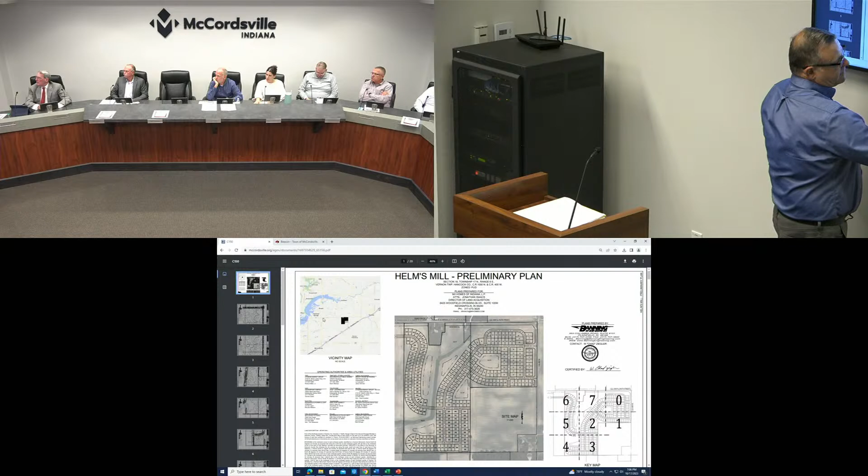And there is an existing tree here too that he would like us to preserve. We do have a tree preservation area along all of the perimeter at 15 feet, and that's shown on the primary plat as well.

Really, unless there's any questions, I think that's all I really have for tonight.

Ryan, can I ask if the records indicate that the board did receive the comment letter from Mr. Kelly for our consideration tonight?

Does the board have any initial questions of Mr. Isaacs? Could you go through the planned phases of your development and the timing? And I believe Fishers is going to place a roundabout at the northeast corner of the development, and their construction schedule sort of coincides with yours in some respects?

Yeah, I can answer all of those questions. We're going to get questions probably about traffic. So the sewer connection point is down at the southern portion of the development. So we'll bring sewer up the ditch, so to speak, to develop sections 1 and 2, 1 being farthest to the north. And that consists of approximately 50 lots in that first phase.

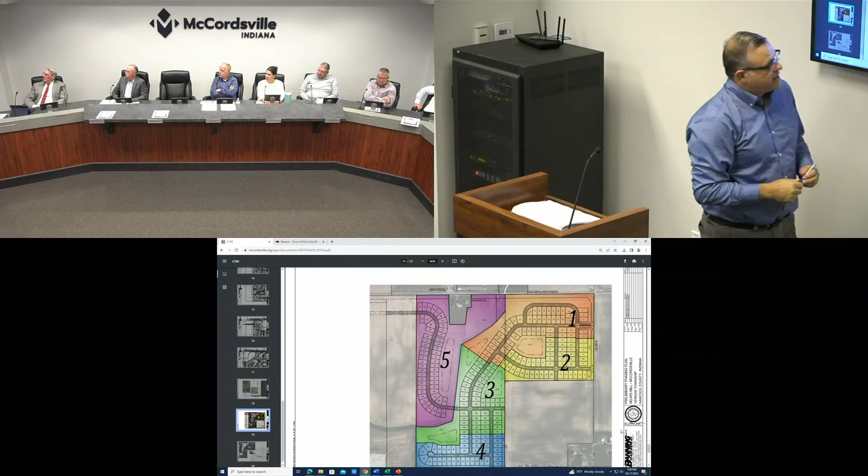And then the yellow is section 2, and then section 3 and 4, and then finish up with section 5 there. And that really kind of coincides well with a dirt balance for the site. This pond will take care of the dirt for 1 and 2. You've got a pond here for 3, and then this pond will take care of the balance of the site.

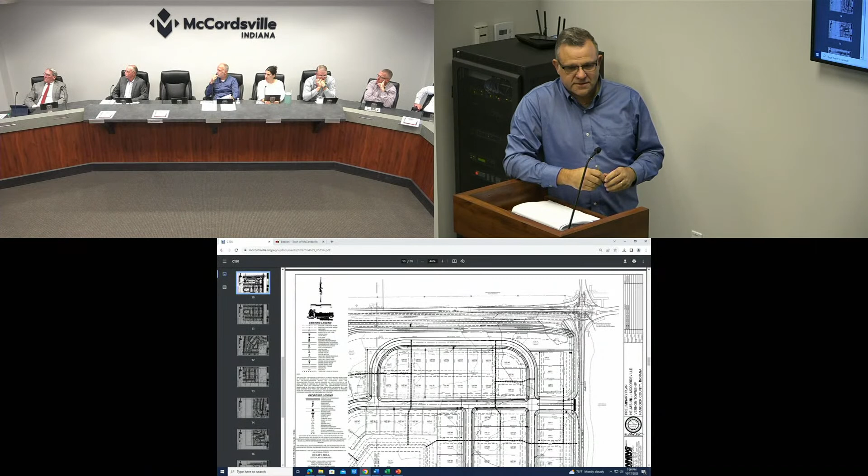So we have met with the city of Fishers and actually have a subsequent meeting scheduled for Thursday with the Hancock County surveyor as well. There is, I believe, we show the roundabout on the plans. So that roundabout was provided to us by Fishers' engineer so that we could coordinate whatever right-of-way needs they have, as well as drainage needs.

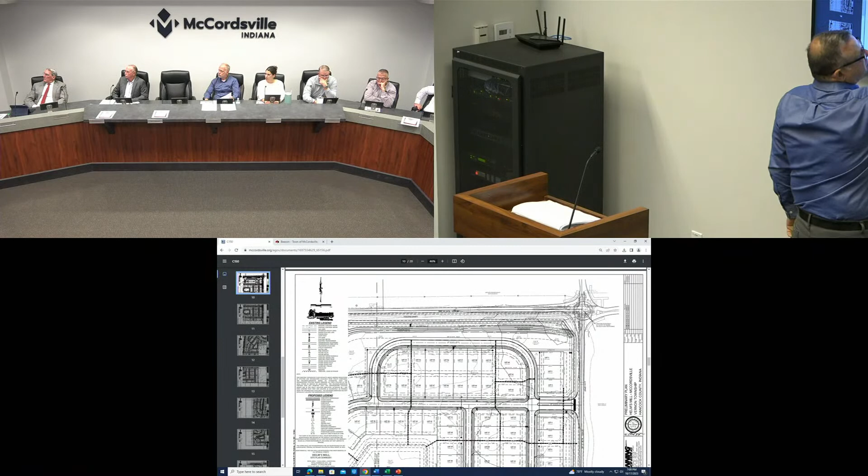So you'll see that there is an open ditch that comes across 96th Street here. Fishers, as part of the roundabout, will be putting in a box culvert underneath County Road 400, just on the south side of 96th Street. And that's to accommodate all of the surface water that comes from the east. Right now, there's 2 18-inch drainage tiles that run along that area, and the county surveyor has asked that it be open ditched at this point.

So rather than having just an ugly ditch on the side of the road in front of a neighborhood, we are asking it to be a 2-stage ditch, which means it would have the normal water level in a deeper trough, and then a shallow shelf. So in high water times, the water would come up in that shelf area. It can be well landscaped. It won't get drowned out, it won't die from having too much flooding. So we think we can make that look more like a river corridor, so to speak, than an Indiana ditch that we typically see around.

Now, is this ditch going to be your responsibility once you turn over the HOA for maintenance? Are you planning on doing riprap through there? What are some of the design concepts that you're looking at with that?

So it'll be a county surveyor responsibility. It'll be a legal drain. So we are working with him on the design of it. I think he's agreed with the concept of the two-stage ditch. So there is a detail of what that ditch would look like, and then our landscape architect will be choosing the appropriate plantings to make it as good as possible.

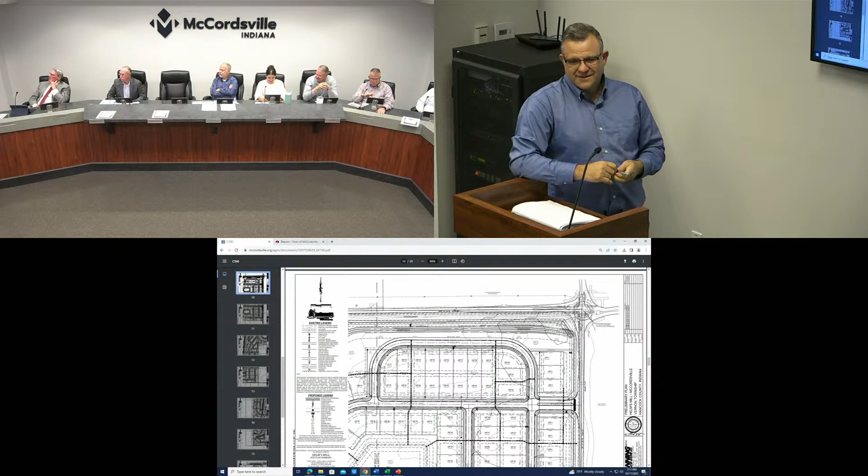The idea is that the two-stage ditch should be more self-sufficient than a typical old ditch. With a regular ditch, you probably have to do riprap and other things to control erosion. In this case, normal water level goes through the ditch, with riprap and rock at the bottom. Once the water stages up, it'll go through vegetation that can handle more of the wet, more of the push. The goal is that we don't have any erosion, so once it's established, it'll be more like a river corridor.

This is a town boundary, so the east-west road on the north is Hamilton County's purview, and 400 on the east is Hancock County's purview. Is that a county road? No, it's ours - that's McCordsville's.

As far as the stormwater, there are two authorities - McCordsville Stormwater controls some of it, and the surveyor controls the ditch part. Can you elaborate a little bit on the 400? 400 would be ours just where we have annexed through, so it's just going to be a small piece of it.

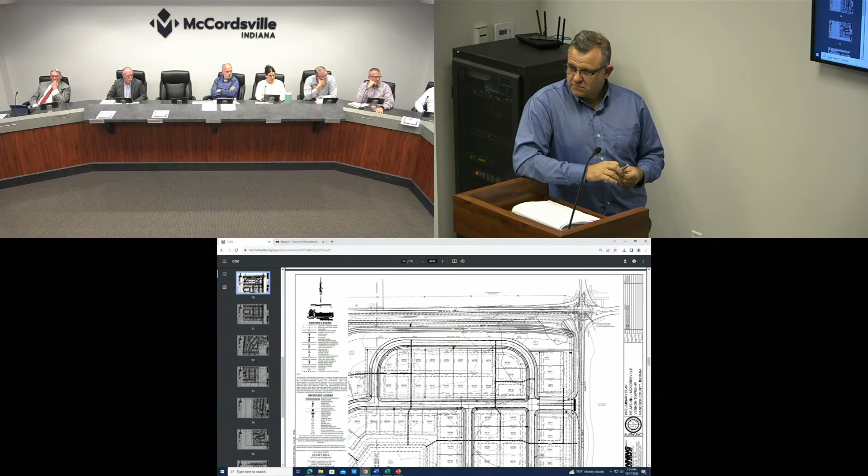Just bordering this property directly, and then south of that to the crossing at the railroad will be a Hancock County road. As far as the stormwater, all the stormwater infrastructure within the development is the town's, and then the ditch would be the county surveyor's - they control that ditch, including the discharge point where our storm sewers tie in. That's consistent with any other ditch in town.

Have you requested any variances in the easement from the top of bank on the county ditch? It seems like some of your homes are very close to that ditch, and there's like a 75-foot top of bank easement.

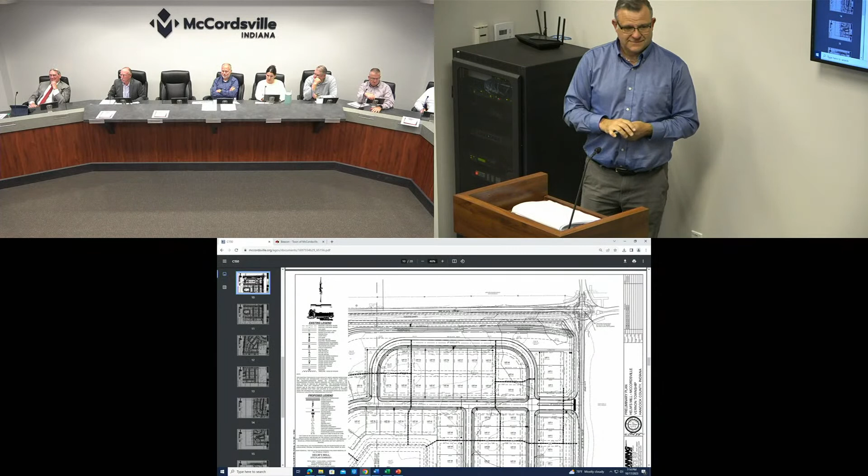I think it's maybe in section 5.

Do you swear or affirm under the penalties of perjury the testimony you're about to give will be the truth, the whole truth, and nothing but the truth? I do. Okay, give us your name and spell your last name for the record.

Steve Brehob with Banning Engineering. We've done two-stage ditches at other locations, and as Jonathan talked about, the whole idea is it reduces maintenance and can look more like a natural channel as opposed to a big, wide legal drain. A legal drain usually has a 75-foot width across the top.

That's something we'll be talking to the surveyor about, because typically with a two-stage ditch, that overall width can be reduced. The idea with the 75-foot legal drain width is that you're digging the thing out and throwing all the spoils off to the side. You're not going to do that in the two-stage ditch, and you're probably not going to throw the spoils into the neighborhood, so the width is usually 50 feet or in some cases less. But that's something we'll work with the county surveyor on - what's the appropriate width for maintenance.

So you haven't asked for a variance yet, but you're anticipating doing that? Yes, we're anticipating doing that and anticipating it being granted.

So when you do your secondary plat, can you mark on that the extent of the variance and what the variance actually is? Yes, at the secondary plat we would show whatever the agreed upon width in that easement is. It's almost a little hard to tell how far the variance is granted - there was one where the easement would actually run up through the corner of a home site if the variance hadn't been granted, but the extent of the variance was not marked on the plat, so it was an area of confusion.

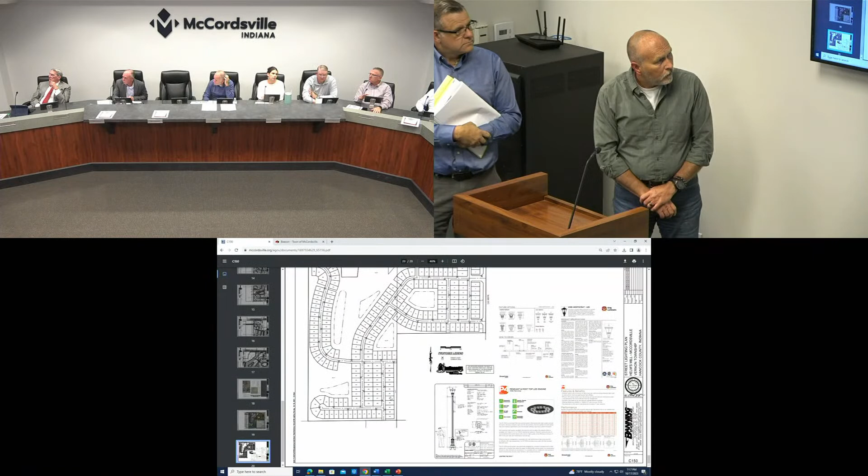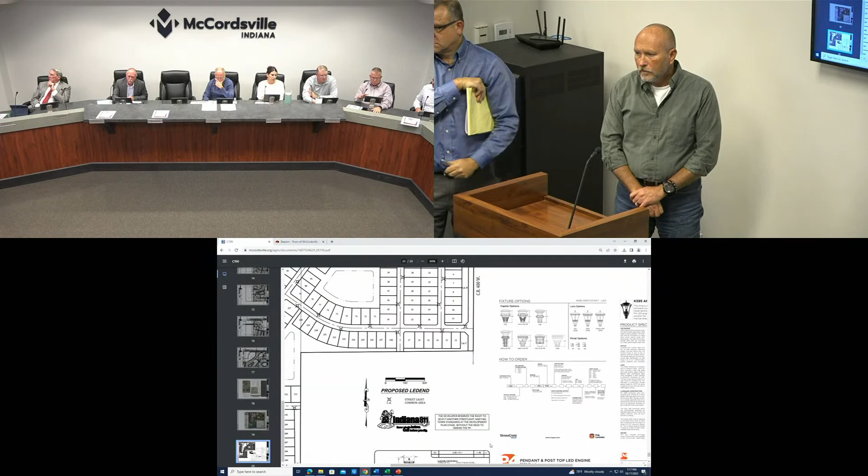I wanted to call out, I don't know what sheet it's on, the street light shown right there. That is our standard street light. The petitioner has added a note to the plans at staff's recommendation that would allow them to change that street light in the future, so long as it's shown on a development plan to the plan commission. So, all we're saying is if they choose an alternative street light, it would still need plan commission approval, but they would not have to come back and amend their primary plat.

Because traditionally, you don't even show streetlights on primary plats, right? We're looking at bulk standards with the primary plats. We're making that very clear. They still have to seek approval. They will still have to comply with whatever language is in their PUD ordinance. But if they do change this streetlight and it conforms to the PUD ordinance, and they show it on a development plan, which gets plan commission approval, the primary plat would not have to be amended.

And then the last thing staff had, and we've kind of touched on this already, is we wanted some discussion tonight on the two-stage ditch for the reasons you guys have already denoted. It's not a primary plat item, but whatever feedback or direction you can give in terms of your expectations for the look, feel, aesthetic of that two-stage ditch, we'd love to hear that tonight so the developer can hear it, as they move forward finalizing that design in conjunction with the Hancock County Surveyor's Office.

That would be fantastic. Ryan, I realize that the surveyor's office has jurisdiction over that area. Do we have any say moving forward in what the look of that will be, besides what they're suggesting with the two-stage ditch? During that review process, do we have any, or do we want that?

We can certainly go and make comments and make requests, and we've had some initial discussions with Chad about that, and they seem to be open to the idea of some decorative or aesthetic elements like boulders and outcroppings and landscape plantings. Ultimately, it is their decision, but they have been open to those discussions, and they seem supportive of the understanding that the town would like to see that occur here, especially due to the location being really the northeastern gateway to our town. So they seem open to it, though it is ultimately their decision. Staff will certainly go and deliver whatever message you would like us to deliver to the surveyor's office.

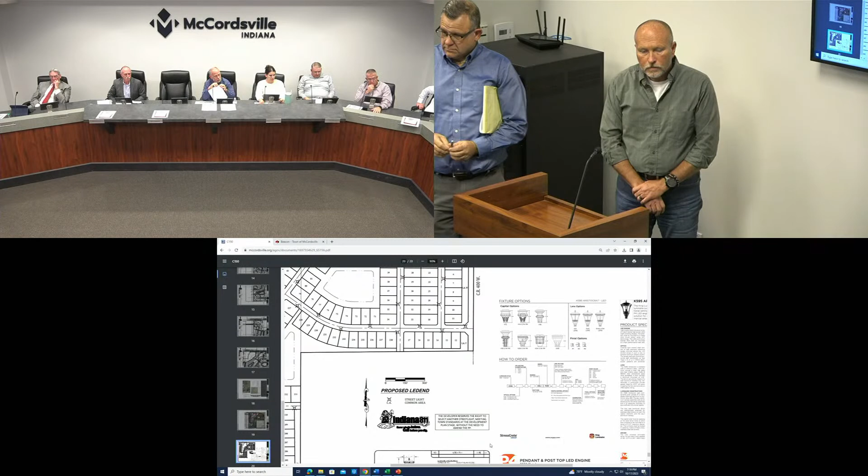So we're kind of looking for a little bit of direction from the public body, which I think adds a little bit of weight to what we then go and make a request for. Well, I'm thinking, like Greg, that this is the entrance to the town, and wouldn't a guardrail be required next to the open part of that ditch to protect from slide-offs on the adjacent road?

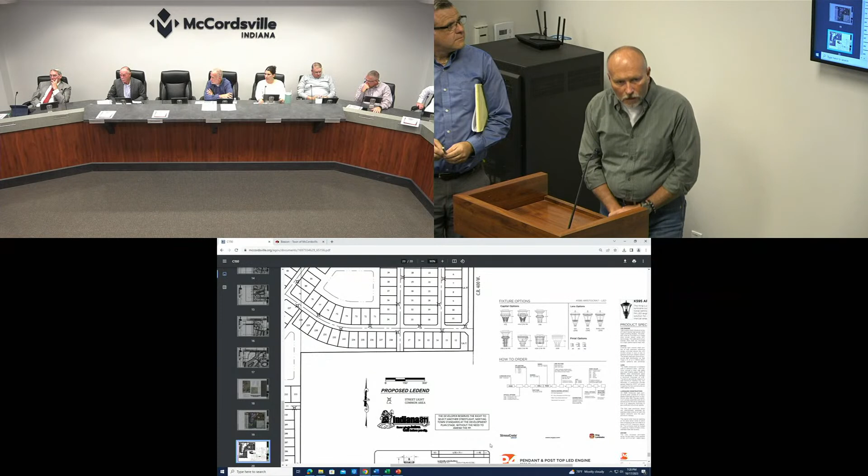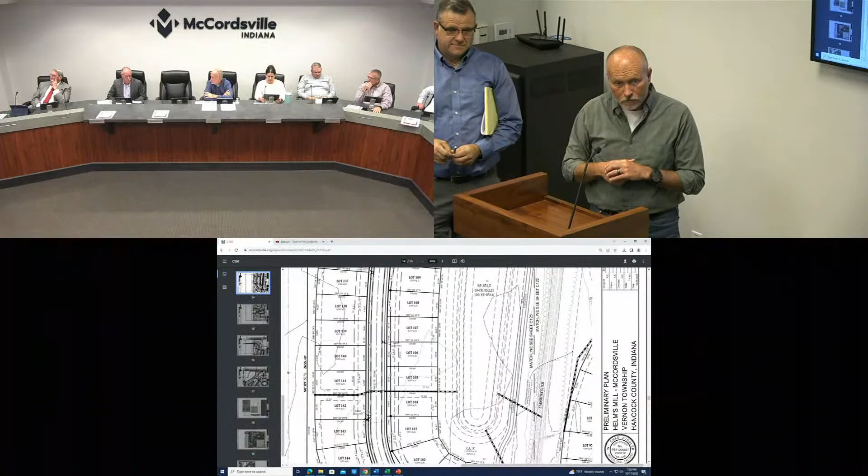I think the ditch itself is going to be far enough away that it would be outside of the clear zone of the roadway and not require a guardrail. I certainly, from an aesthetic standpoint, would not want to see a guardrail. I was going to say if a guardrail is required, my personal preference, and I believe the public's preference, would be for a wooden guardrail, if we could get one like is on the trail by 96th and Carroll Road.

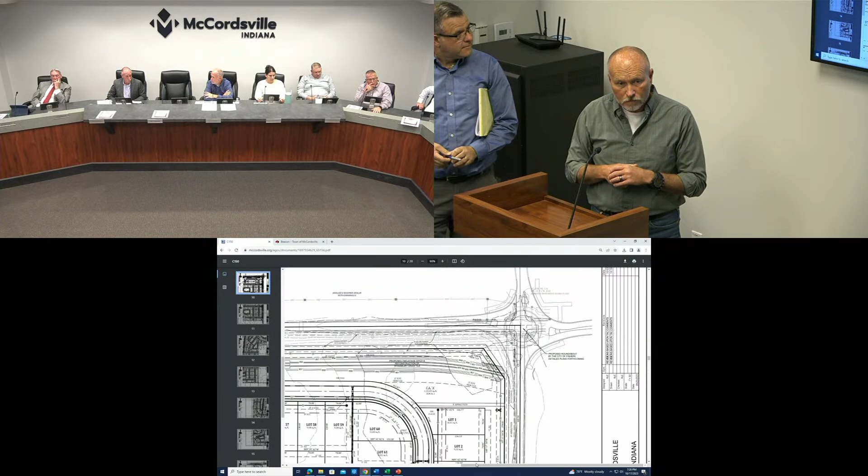Or would that be Fishers' responsibility, since when they do the... Right, if they wanted that. If we get input.

Our stormwater ordinance requires some form of barrier if a detention pond is within one right-of-way width from a public roadway. It does not cover a ditch like this, so I think that decision gets basically pushed off to the county surveyor's office. They have enforced that in the past where the ditch is directly adjacent to the roadway. I have not had any conversations with the surveyor's office where they were anticipating a guardrail along this. There is one, actually a lake south of 116th Street in Fishers, and there was a slide-off there.

The barrier was a white rail fence, and the car went through it. A passerby was able to rescue the driver before she drowned, but there was not a guardrail there. It's substantially off of 116th Street, so I imagine it exceeds the distance requirements for a guardrail, but it was protected with a fence, and it nearly resulted in a fatality. So some protection might come up.

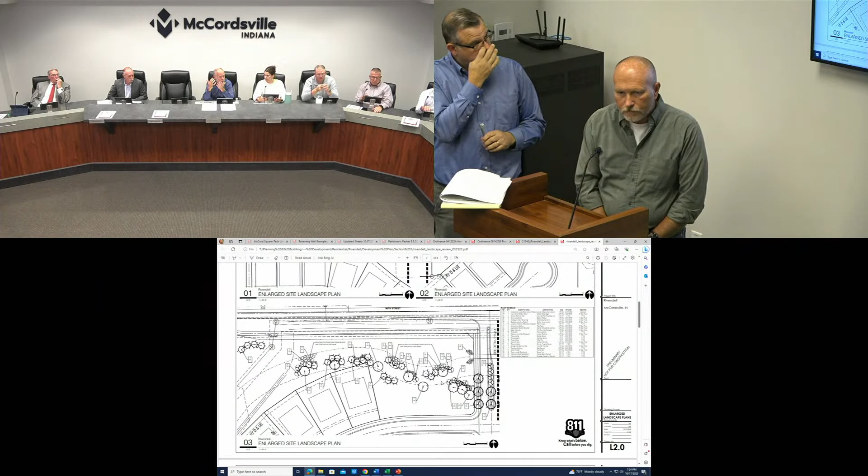Well, I think we were supportive of that plan, so if we could get something that resembled that. And I would like to add that you'll be able to see this again - we'll be bringing a final construction plan back with fully landscaped details.

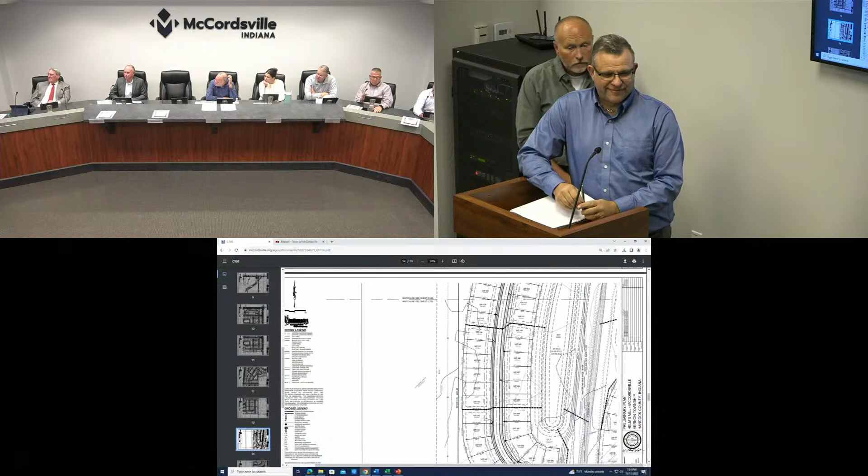For Mr. Isaacs, what are the plans on the trail to go around the stranded parcel there? Or is there an agreement where it can go across the front of it? There is language in the proposed PUD that says we will make every commercially reasonable effort to acquire right-of-way to put that trail in. I'll give it better than the college try. And if not, we're going to go around the back side of it?

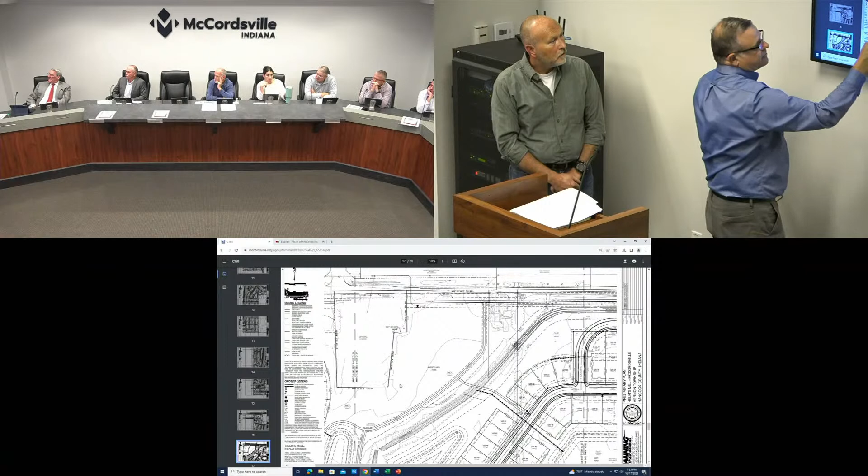We do have an internal trail network that's coming down, and then it's coming through two lots, through the common area and back up to 96th Street. So there is a trail that would get you there.

Long term, if we're not successful in being able to acquire right-of-way there, at some point Fishers is going to expand that road to something beyond the 2 lanes that are out there. They'll have eminent domain opportunity to get the right-of-way they need.

If it's a federal job, sidewalks are guaranteed, I would say. So at that point in time the sidewalk would go in for sure. Long term, it'll get there. In the near term, we'll do every effort we can to try to get something there. Yeah, Fishers typically makes 4-lane boulevards with sidewalks.

As far as the guardrail is concerned, obviously Fishers is designing the roundabout and they're going to have federal standards that they have to meet since it's a federally funded roundabout, I believe. So if that does become a situation where it has to have a guardrail, I think we need to push hard that it's not an INDOT standard guardrail. Well, you are providing the right-of-way for the southwest corner of the roundabout, so that should give you some sway. I would hope so.

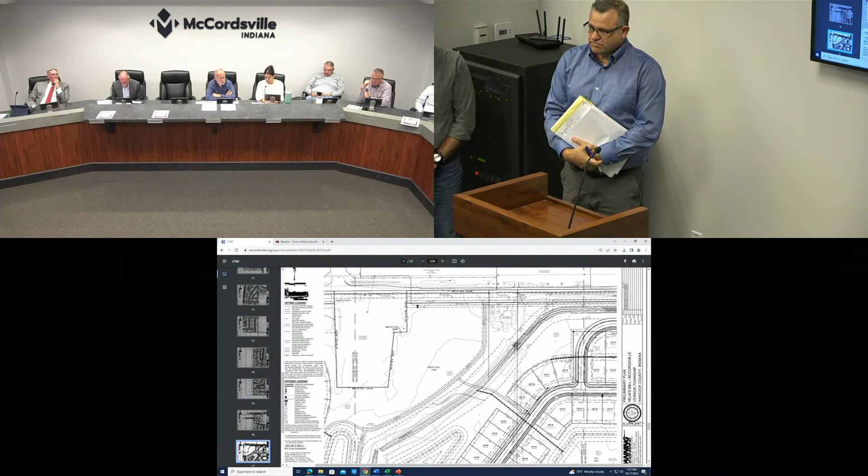Ryan, is there anything else you wanted to add to your report? I have nothing else to add - staff is in support of the petition. I want to reference again, you mentioned it earlier, but we do have a letter from Mr. Kelly who's here tonight, and we certainly need to open and take any public comment prior to any action.

This does require, as Ryan indicated, a public hearing. I would entertain a motion to suspend discussion of this matter so that we could open it up for that public hearing. So moved. Second? There's a first and a second to start the public hearing.

If anybody from the public wishes to address... there's a first and a second to suspend and go to public hearing. All in favor, say aye. Aye. Any opposed? Okay, thank you.

Let's try that again. If anybody wishes to make a comment or address this matter before the board, please come before us. Come on, Mr. Kelly.

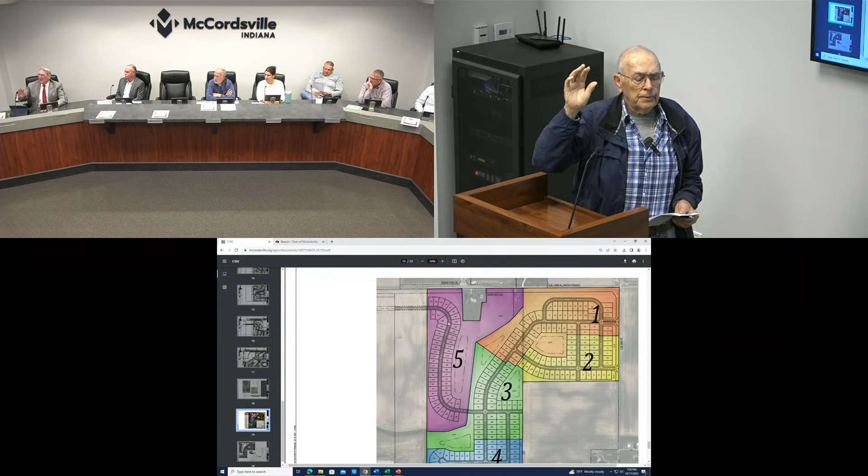Let me swear you in. Do you swear or affirm, under the penalties of perjury, the testimony you're about to give will be the truth, the whole truth, and nothing but the truth? Yes, I do. Okay, and if you'll give us your name and spell your last name for the record, please. John Kelly, Kelly. Go right ahead, sir.

I appreciate the fact that they've agreed that I own the property east and west of them there, and that they're going to try to make the drainage from all my property surface drain down there. Now, John and I both talked about that, and I still don't understand exactly what he's designing, but he said when they got it done, he'd show it to me.

But I want a place where, as I have now, I can look down the PVC pipe to my 10-inch drain there, and I can see water running when it's running. We was down there the other day, and we're in a drought, so there wasn't any water running.

He agrees that the Shellbark hickory tree that's right close by there, that I know has to be over 80 years old, will try to be saved.

I would still like to see a 3-foot mound all around the property that I adjoin it on my west and north sides. That would be a quarter mile from 1000 North or 96th Street, and a quarter mile from 400 West. So that is what I would like to see.

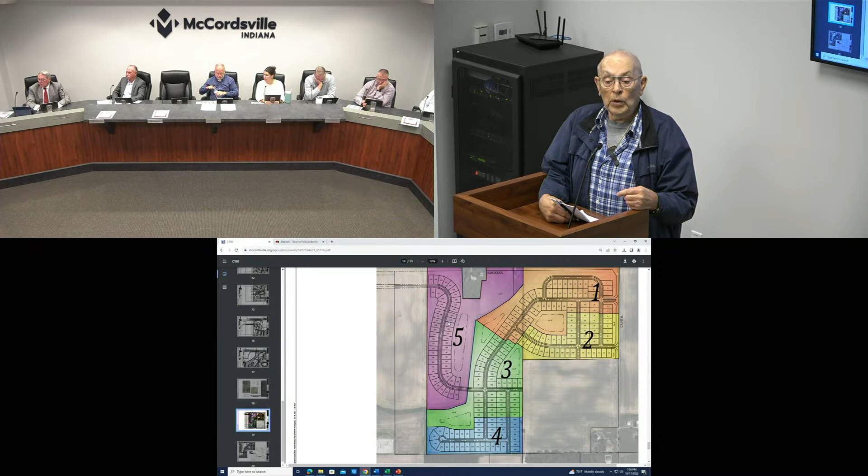So everything else is in the letter that I put there, and they're saying that the mound is not practical for that, from their part. Well, there's a lot of mounds around a lot of different subdivisions here. And this would be a quarter of a mile from, like I say, 96th Street, 1000 North, and a quarter of a mile from 400 West. So that's what I have on my mind. Thank you. Thank you.

Anybody else wish to come before us, sir? Do you swear or affirm under the penalties of perjury the testimony you're about to give will be the truth, the whole truth, and nothing but the truth? Yes, I do. If you'll give us your name and spell your last name. Mark Mills. My last name is Mills.

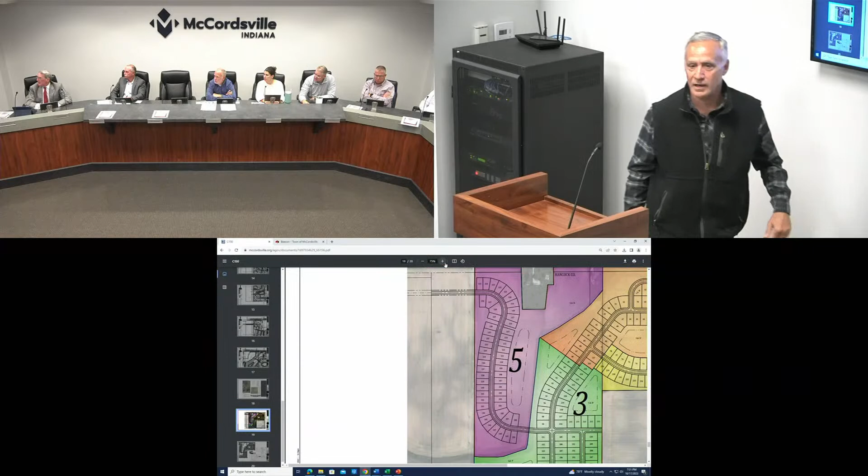Thank you for letting me speak tonight. Ryan, can you blow up this section just a little bit? That's the property I own, and I spoke at the Rivendell discussions a number of times. Sorry I wasn't here last week. I couldn't make the previous meeting.

My concerns are the same as they were then, slightly different now. First, because we were talking about drainage, and we'll talk about traffic in a second, specifically some of the dangers. I just want to make sure whatever drainage they're working on, it's best effort, not commercially reasonable. That's just a loophole to get out of something, but best effort to convey it properly north.

This area here floods a foot deep, three times in the last five years. This area here can flood a foot deep, both at the same time. If that water pushes back my way because of this special ditch, or this approach—I don't deny it might be a better approach, I'm not arguing that.

I just want to make sure that water won't go backwards or go south. I want to make sure it goes north, or doesn't recede or convey less, is maybe a better way to phrase it. Just some assurance of that, that it was considered before you approve.

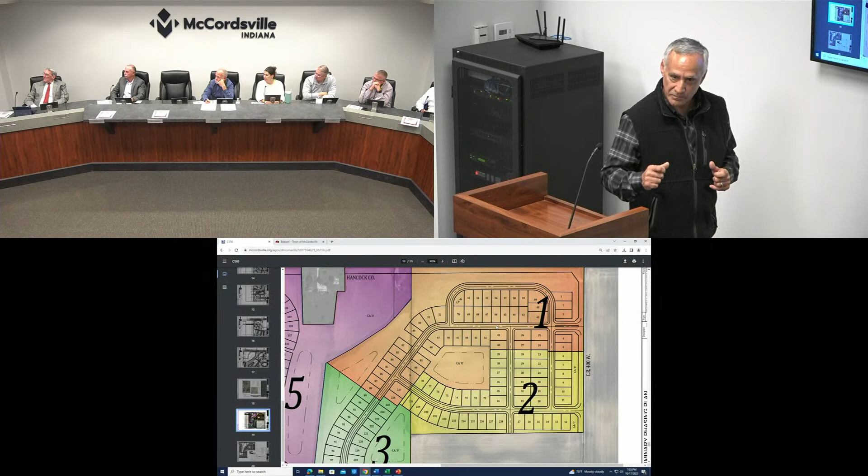And the second one is, can you go to the entryway? I think this also gets to the traffic, gets to the original Rivendell, where they had to do the same thing. They had issues with how they were going to drain up front on 96th Street.

These 2 entries are going to be a disaster for traffic. Do you know right now that once a month a semi has to back up? I sit on my front porch from 4 to 7, and 10 to 15 cars pass other cars.

There's been, what, 4 train wrecks? You can't even get over that train track now without somebody running up on you. If you try to do it properly, it's almost like a road rage situation.

I'm just bringing this concern to you because a modification where you have one entrance come in here, like the Rivendell main entrance, would solve all of those problems, including the drainage problem, or the fancy drain, I'm not sure how to describe it.

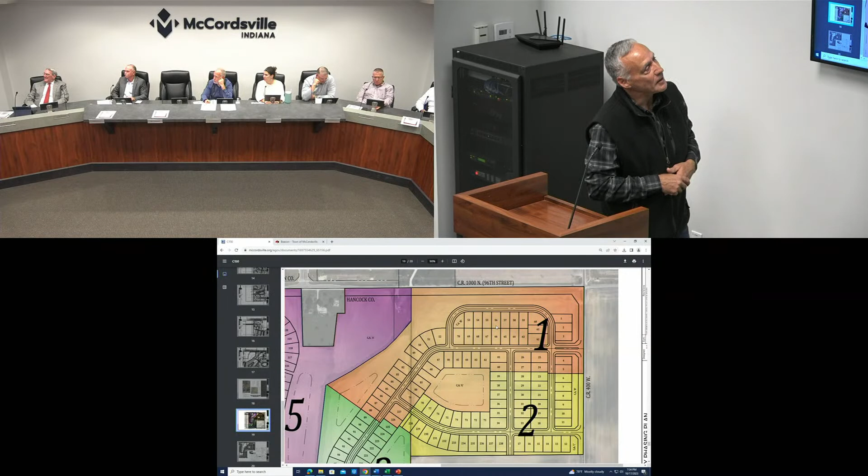Your guardrail issue, which is going to be a real disaster. I can just tell by the traffic what's going to happen when you got all these cars and you got a semi backing up. It's going to be horrible. There's going to be wrecks, death for sure.

And then I just want to make sure that the size of these houses have been decreased, if I'm not mistaken, from the Rivendell project. And that's, I think, a big problem for the community.

I've invested heavily in this property, landscaped it. To Mr. Kelly's issue, I've started putting trees around it already, so I could both protect and be a good community person. I don't just want it one way, it's a 2-way street, right?

So yes, they should be screening the light and noise out, absolutely. But they shouldn't also downsize the homes so that my property value goes down. I'm 2,200 square foot. I put a 1,500 square foot brand new 2-car garage up.

I plan to do some more development. I don't want $300,000 homes sitting around my house. Not that that's a bad thing, but not when across the street they're all 500 and 600 and everything else around McCordsville is.

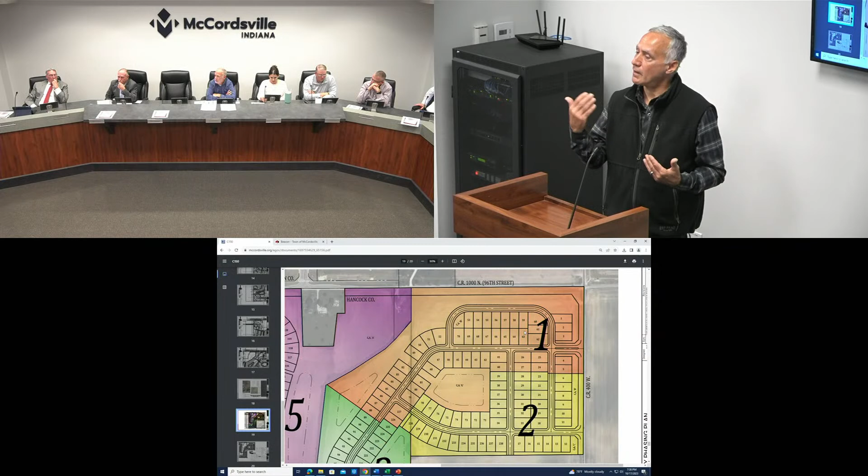I understand. And Ryan, one last thing: do I have to put this in writing, since last time we had trouble with it being captured properly in the notes, the town meeting notes?

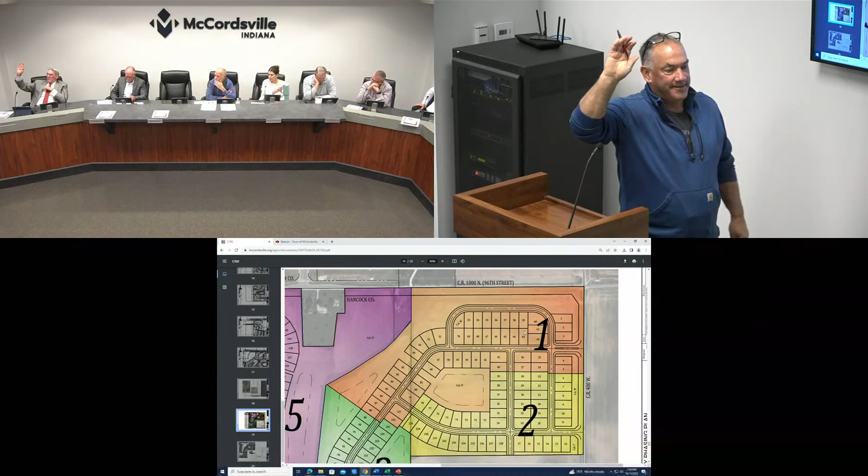Go right ahead, sir. I understand your comment about going to the county commissioners and all that. I plan on doing it. We have called and complained, deaf ears, but they did put up two speed limit signs for us, which are a joke because nobody obeys them. But as Mark said, after this gets developed, from there to here is McCordsville's, and McCordsville is draining two entrances or exits onto that road.

So that does kind of fall into your guys' problem in a way. I understand from John's point to the tracks, it's still county, and CSX and the state highway has that, but the town of McCordsville is contributing to that by dumping them in there. And that's why myself and Mark talked about Rivendell throwing an entrance in there off of 96th Street. That was a beautiful entrance they had proposed, very nice. I don't see why they couldn't do it.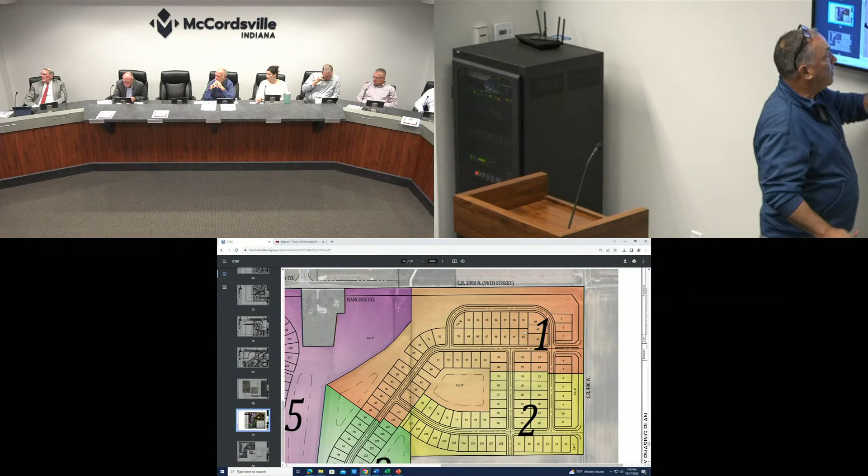And then another issue is that drainage. It doesn't take very much to put a manhole there. For that drain, the swale and all that stuff goes to a pond clear back over here. And that ditch, I'd say it's probably maybe 48 inches deep in that general area. So how's that swale going to flow down to the pond? Those are just some issues I think about all the time.

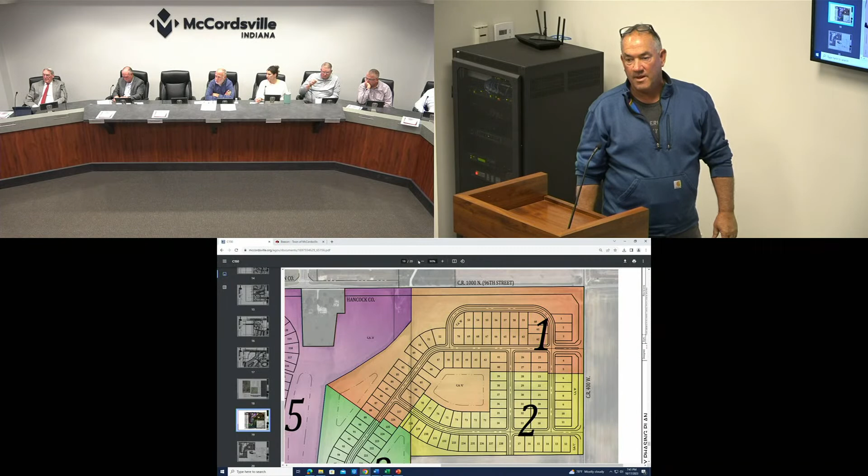Before I ask the petitioner, Mark, quick question, because one of the things I am concerned about is this development potentially flooding the farmland. This is a workable agricultural area, and we don't want the neighborhood causing an issue for that. What kind of drainage study has been done, or has there been?

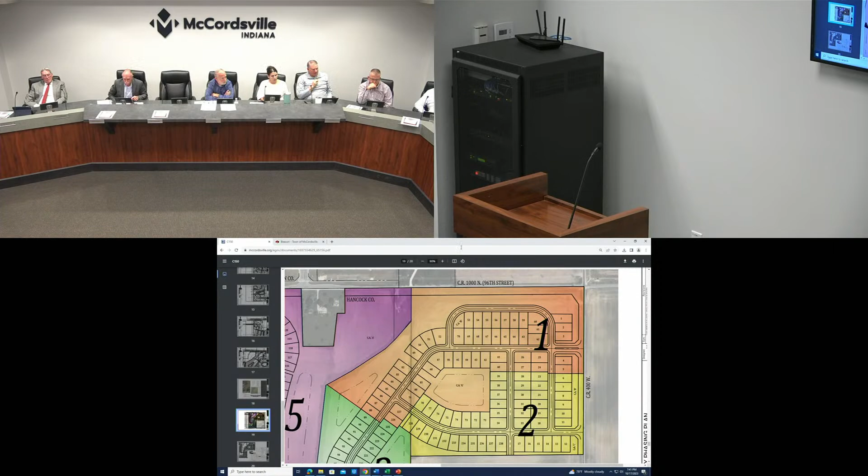It hasn't been done yet, we're still early in this process. But the requirements that the town has in place means we will address all those as they go through their development plan. They're required to prepare a drainage study, and then that gets reviewed, and we look at addressing all their comments. Mr. Kelly's comment about the tile, locating that in a structure, I'm absolutely positive we can do that as long as we can get it located on the survey. We locate it, we can require them to place a structure where that comes in so we can have access to that. So that's not an issue.

The drainage, I'm not sure if I followed the comment, but I thought I heard drainage going out onto 400. Just to be clear, everything from 400 is draining towards the west, and all that gets routed through their detention. Even everything on that area of the 40 acres, the Kelly 40 acres in that L-shaped notch, most of that drains to the west. So the developer would be taking that off-site water and routing it through their development, meaning there won't be additional water shed to the south in any fashion. Everything coming off the field east of 400 West hitting their development will get routed through their storm sewer, and same with anything coming off the Kelly 40 acres going west. So there shouldn't be any additional water at all shed on them.

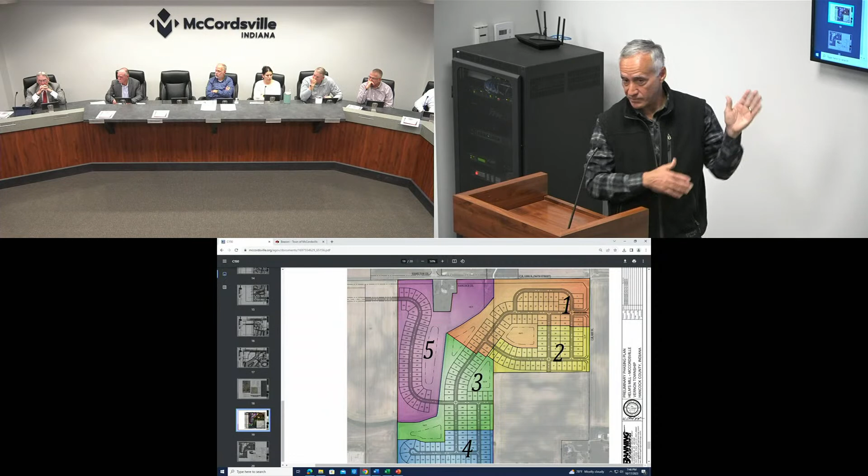And nothing from this new ditch that's going to go in? It's not going to drain backwards, or south? No, it's going to go west. They're going to extend the existing ditch, and all their detention is going to tie into that ditch, and that ditch flows west and south, and ultimately goes back north into Hamilton County.

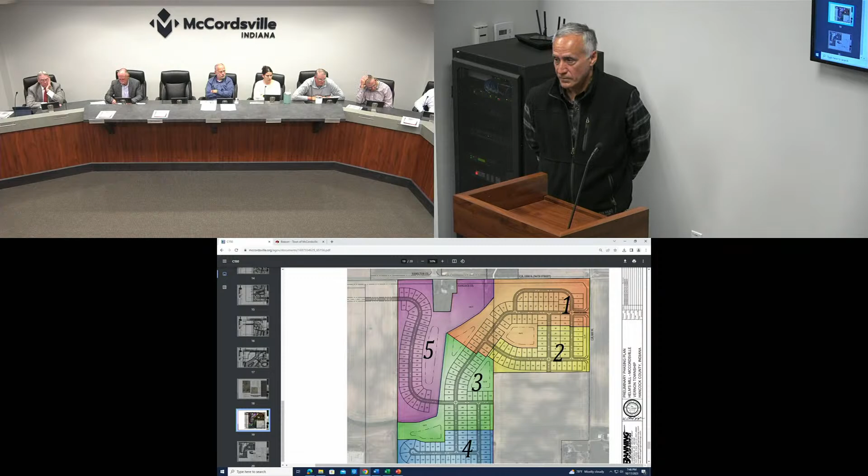All right, if you feel comfortable in that, I accept that. Sure, for now. Will this be discussed again? Yeah, we'll talk process here in a minute.

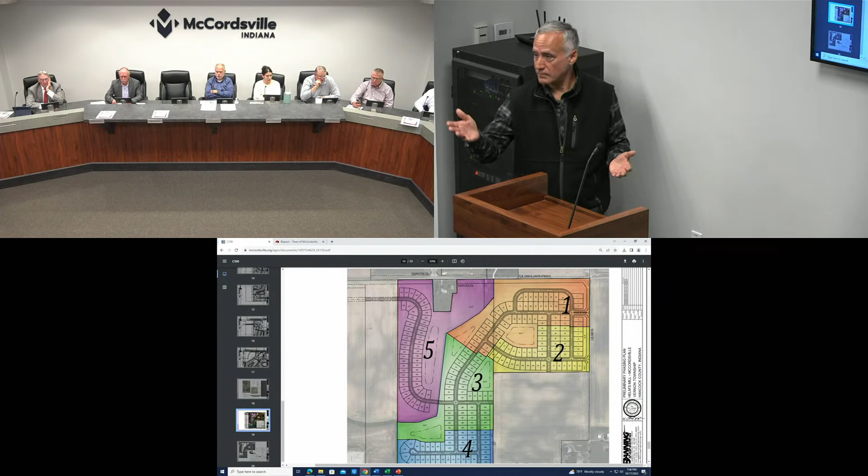Mark, could you give us the 30-second overview of pre and post development release rates and how generally new development greatly decreases the amount of release in a project? Yeah, just the requirements in our ordinances...

Basically it gives a controlled release rate that the developer has to do. So they have to detain water in their ponds and release at that rate, which is a fairly slow rate. What ends up happening is they collect all that water, it comes through, stages up in their pond, and then gets released over a couple days from a storm event. Right now, the water just goes where it goes - when it hits, it just routes through low spots and surface flows and flows through tile. So this is going to be a dramatic difference from what you're seeing today.

So when a development goes through, overall it's a dramatic improvement of the existing conditions. These guys are not directly adjacent to you, so I can't guarantee how much it's going to impact you, but they're going to greatly improve drainage around their development site. So they're going to hook up all the existing tiles that are in those fields now.

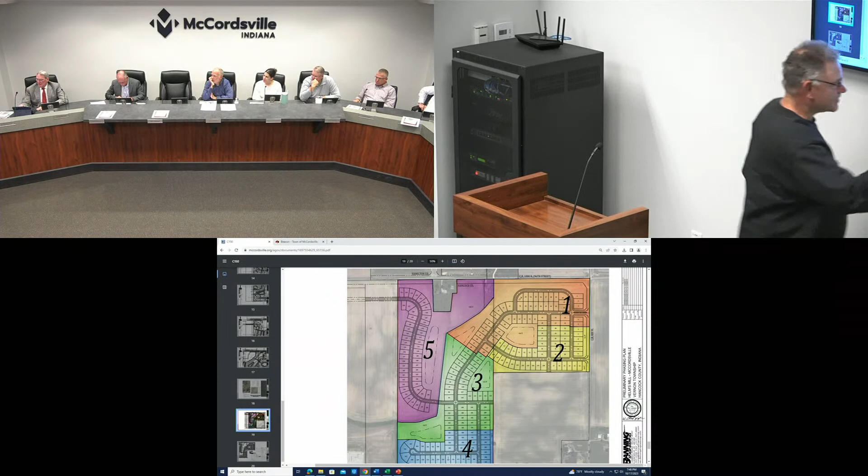Brian Kelly, K-E-L-L-Y. I guess my question is, because there's several ditches right through here that flow this way - I own down here - are they going to hook up everything that's there to keep the water flowing?

When you say ditches, did you mean tiles? Tile ditches, I'm sorry. Tile ditches. So what the developer's required to do, and generally this happens with most developments, is they put in some sort of perimeter swale, and that's anticipated to try to intercept any off-site water that's coming into their site.

The more we know about the tiles, the more we can locate those, the more we can guarantee they'll get connected in. Wherever those tiles go through that development, they're going to be crushed fairly early in the development just with earth-moving equipment going across. So what we have to do is intercept those tiles and tie them into their storm sewer plan.

But they're going to hook them all up? That is the plan.

The only thing I can't guarantee is if we have a tile that we didn't know about beforehand, and it's not discovered during installation. That would be the only way we'd have a tile that wouldn't be connected. So the more information adjacent property owners can provide us and the developer about where tiles are located, the better chance we have of not missing any.

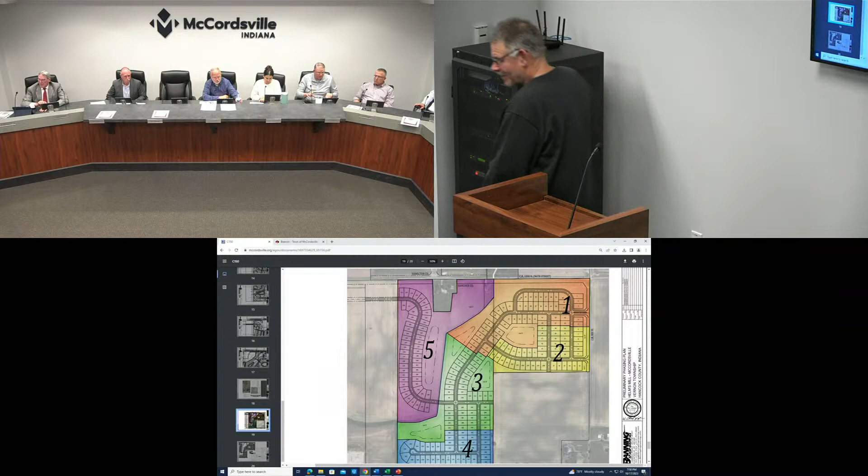Okay, so there was one other concern that was brought up at town council, and this letter was also read into the record there. So if the petitioner could come back up, I do have one concern. I want to make sure we're, do you want to close the public hearing before, or, it doesn't matter whichever way you want to do it. It was asked in the public hearing, so I figured we'd get an answer in public.

So now I have a better understanding of who lives where and what. You did mention at the town council meeting that this is farmland, and you want to keep residents off the farmland. You were hesitant with the mounding, and I kind of understand why, but what steps are you guys taking to mark the territory, per se? Because you have one side here, lot 211, that butts right up to the property line, and there's some common area elsewhere that has some separation.

Yeah, so obviously we have common area along almost all of the perimeter. The residents that move in there don't own to the common property line, they'll own further back. We can take a look at lot 211 and see if we can get common area in there. Without knowing the width of these lots, we might be able to skinny them down and create that common area. So that's really the extent of the feeling there.

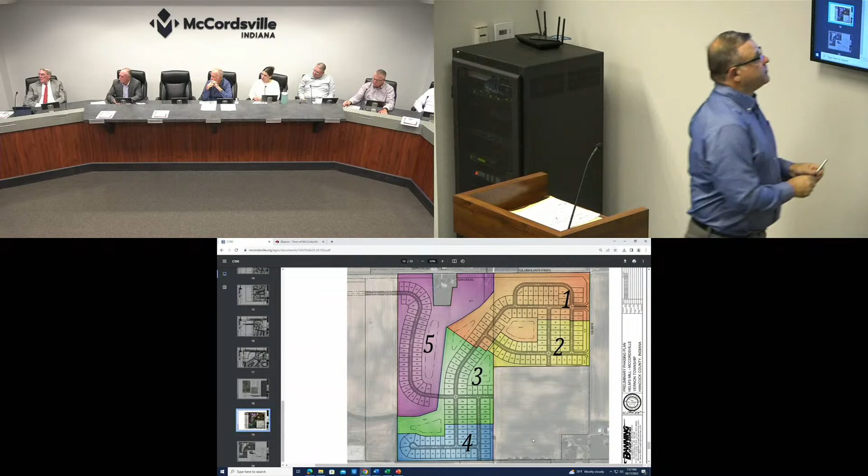Yeah, that entrance would want to be right there. So you did look at that and decide to curve them to the west? Yeah, I mean, I think Rivendell had that same design that way, and I think that was the reason why you could not get there. Also, there's an entrance gonna be right here, in the last section of Arbor's development.

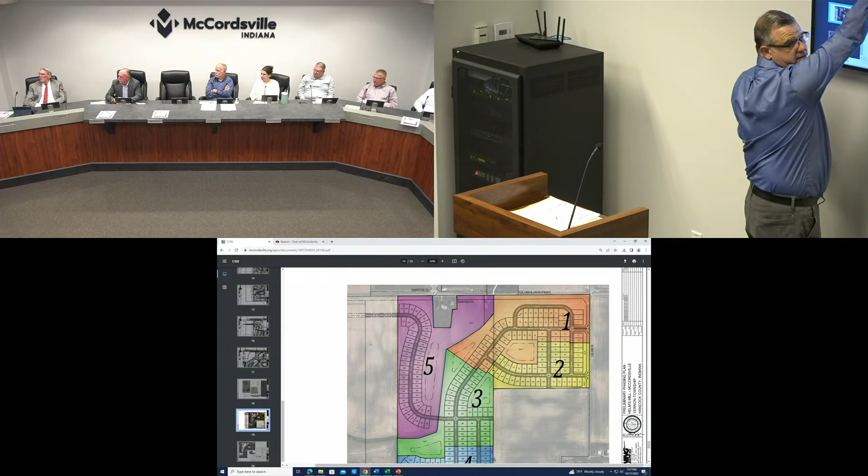So actually, the road running through section 5 there is actually going to exit to the north. So not all of the traffic's gonna go out exits 1 and 2. By the time the two neighborhoods are fully developed, some of these people are gonna be able to go out to 96th Street. So the ones that want to go east on 96th Street from sections 3 and 5, and a future development that perhaps stubs in on the southeast there, could all go out to the north.

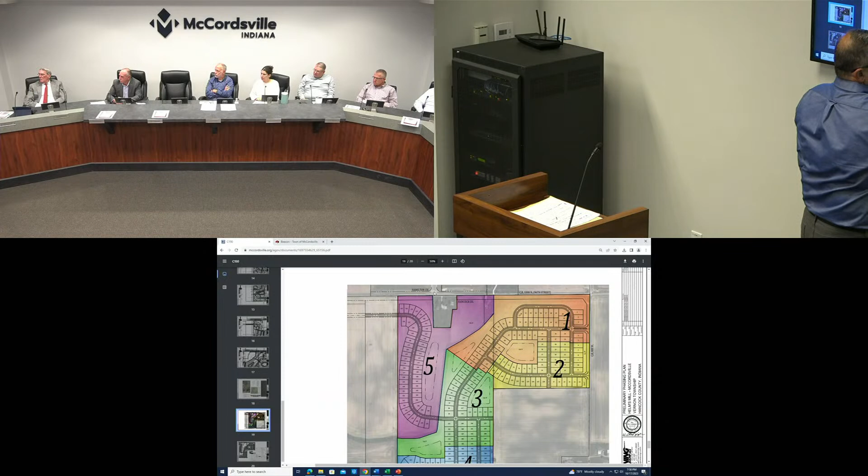Because I definitely could see that if this were to develop with this stub street, that's a pretty good shot to get you up and out to 96th Street in the future. So not all the traffic dumps onto 400.

Today it does, because that's the only access point, but long-term, until the stub out to the west, to the northwest, comes to fruition, it does.

And the more traffic that you see on 400, the less people are gonna wanna go that direction. I think you're gonna get stuck on that railroad track for 20 minutes. Not sure how often you're gonna wanna do that. It's not a shortcut any longer.

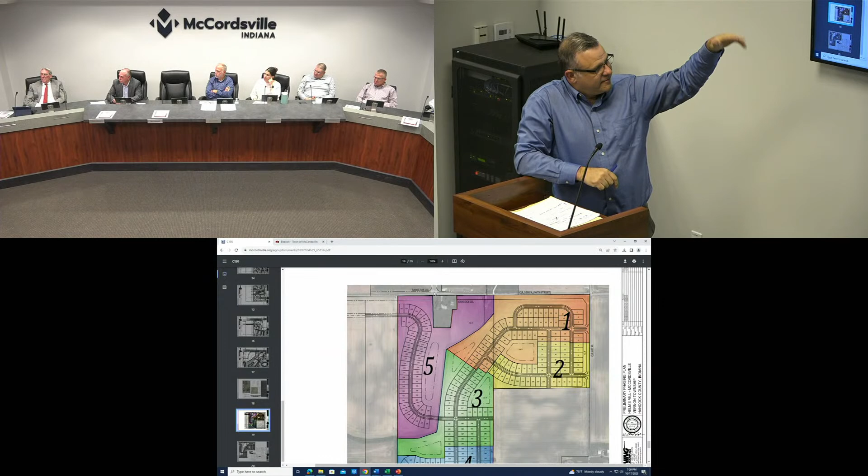So, people's driving habits will come into play too on how traffic is going to work. We visualize with the roundabout there, in the future, people are gonna want to use 96th Street to get out, or 1000 to get east or west.

So I know there are, I think, two things that we've not addressed a lot with the traffic and the lot sizes, and both of those items are really not primary plat items. So this petition will be back at the town council on November 14th for a second reading, and for those folks that spoke tonight regarding traffic or lots, home size, or anything else, that would be the opportunity to address the town council at the rezone stage, to have those comments heard and considered.

So, what date was that? November 14th. I don't think we've officially closed the public hearing.

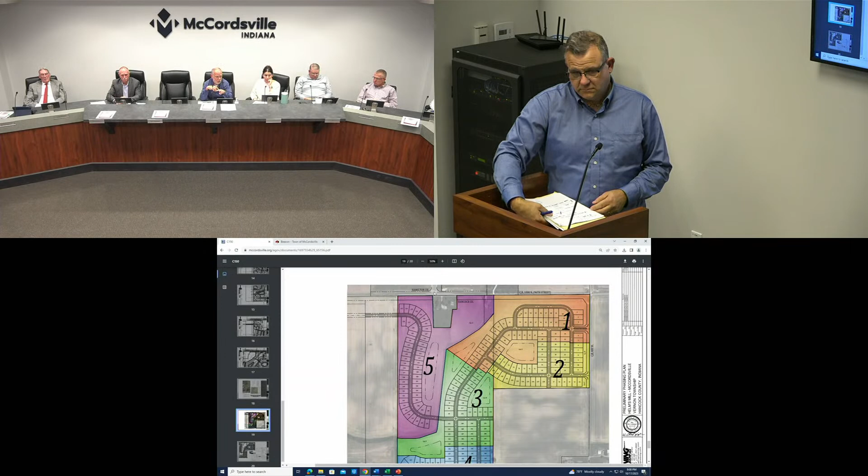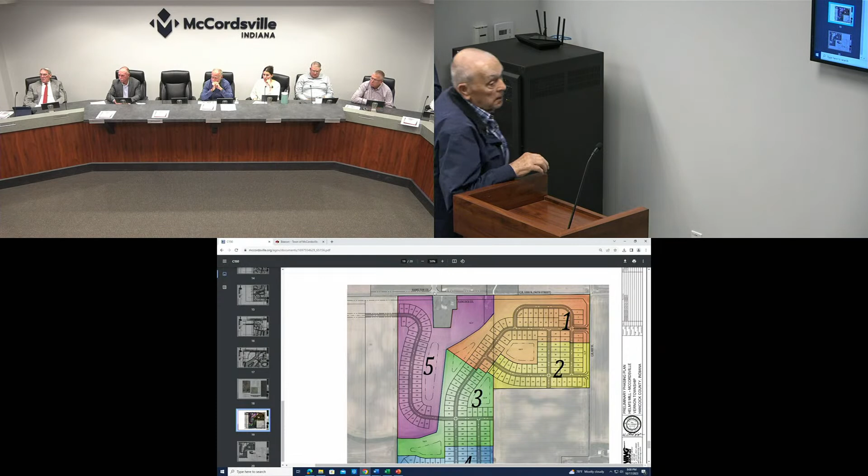So, all this water comes to this point. If it's up here, it's still brought back to that point, and then it goes straight over to B Camp ditch at the turn. There's a corner in the ditch over there. And when they put that ditch in, they started their ditching machine at the bottom of B Camp, then came back over to my property line to attach all that, but a lot of it was already in there at that time.

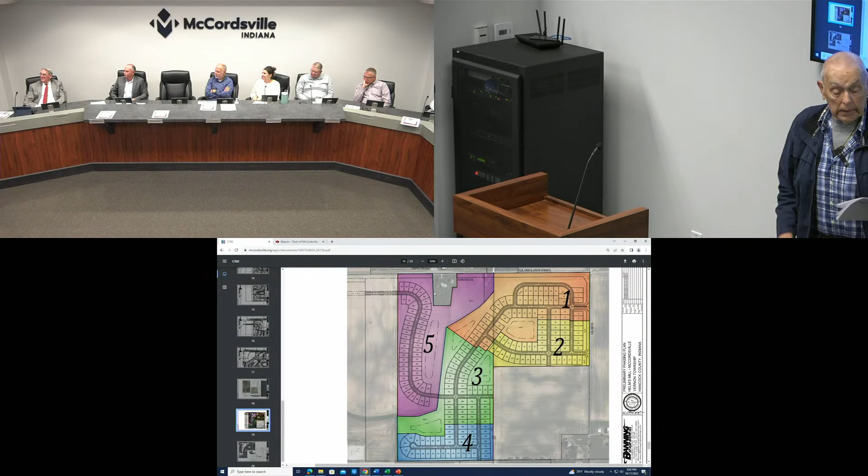So I just want to make sure there's no issue there. That's the reason I'd like to have the mound there, because it's not hard to see a quarter of a mile, even though I'm blind in one eye and can't see out of the other. Thank you, gentlemen.

Once again, just give us your name. Brett Kelly. This ditch up here that's being proposed, how deep are we talking about? We're not proposing, Fishers is proposing.

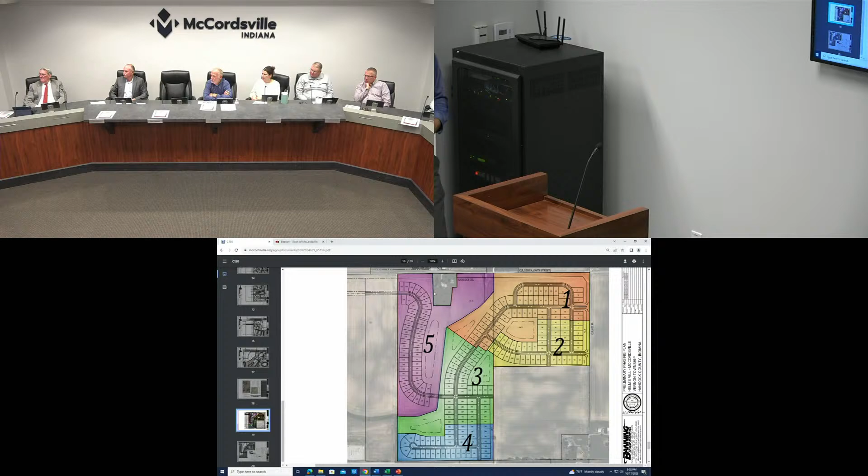Okay, does anybody know the depth of that? The only reason I'm asking is there are two big culverts that run along that, which they put in about a year and a half ago. So I was wondering how deep is that going to be, and would it really need that guardrail there? I can't see that really being that deep. I'm just curious.

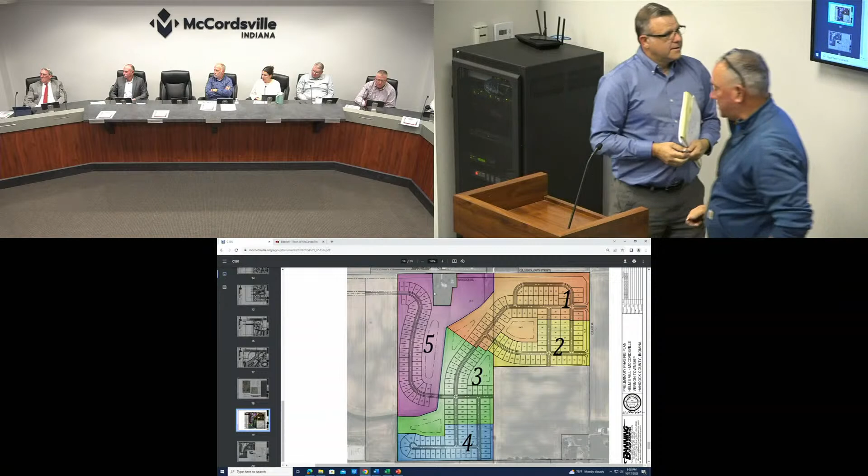The depth of the ditch will be established by the depth of the drainage culvert that Fishers is putting in underneath County Road 400. We do have an elevation of that, and we've actually asked them to lower it maybe half a foot or so, but that's not a big deal. That was to make sure the ditch will function. So they were looking at that.

I remember when they put that in, those pipes were put in to stay. Yes, they're staying, they're not pulling them out. This ditch will be next to that drainage pipe that comes out.

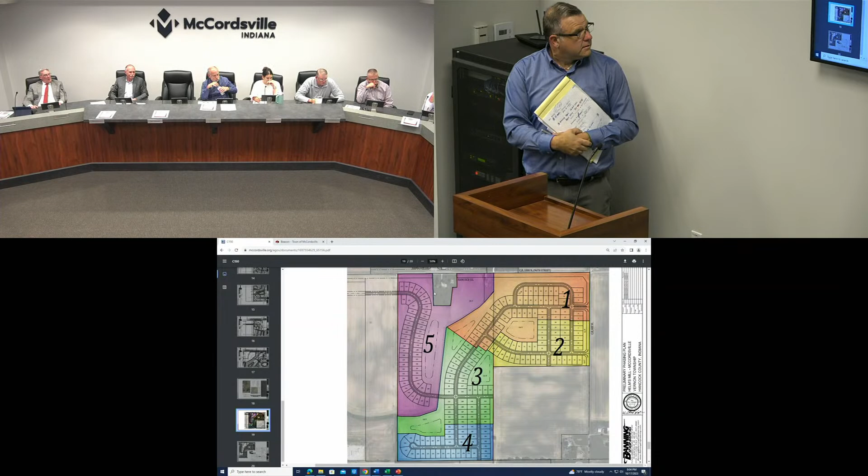The other thing is this ditch is proposed to be a two-stage ditch. What you see on Bee Camp right now is a fairly defined ditch. A two-stage ditch comes up a short distance and then has a long, flat slope that allows it to stay within the defined area during low flows, and spread out over a wider area during high flows. So it's not going to be the deep defined ditch you see right now.

Maybe. All right. I'll make a motion to close the public hearing. Second. There's a first and second to close the public hearing. All in favor, say aye. Aye. Motion carries. Do we have a motion to resume discussion on this matter? I move we resume the Plan Commission meeting.

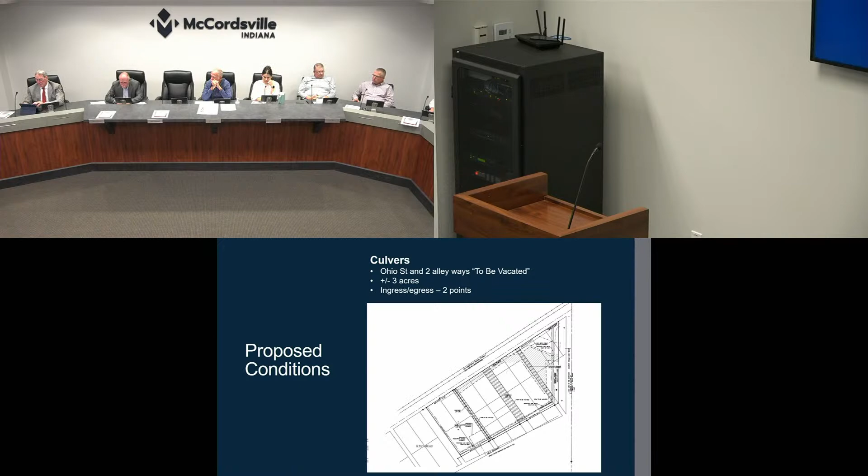Right now we are at the primary plat stage for this. We have both items on the petition tonight, so staff is kind of giving the presentation for both. We do need to act on them separately.

So the first thing we'll need to do after discussion is to open a public hearing for the primary plat, take any public comment, close that public hearing, and then vote on the primary plat. Then we can go into discussion on the development plan. That does not require a public hearing.

Staff has just one comment on the primary plat and a number of comments on the development plan. We'll hold those for after the petitioner's presentation. I think Joe is presenting. Joe, what do you prefer up on the screen? Let's do the plat first, and I'll run through that.

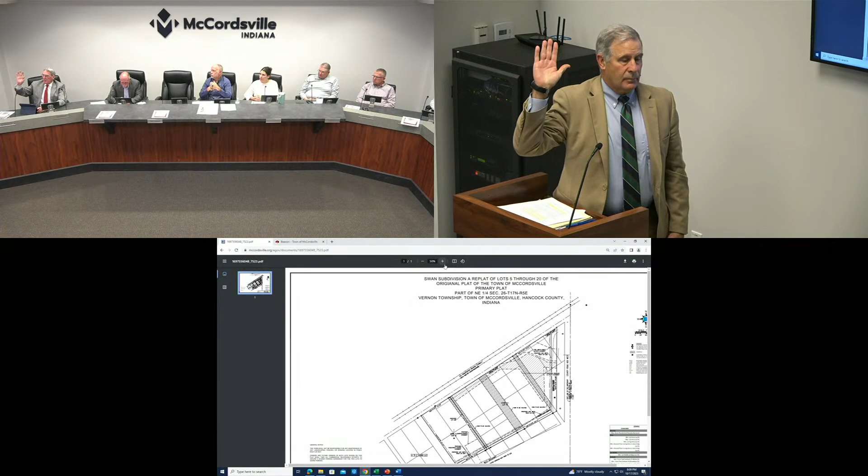While he's doing that, let me swear you in. Do you swear or affirm under the penalties of perjury that the testimony you're about to give will be the truth, the whole truth, and nothing but the truth? I do. You'll give us your name and spell your last name, please.

Thank you. My name is Joe Calderon, C-A-L-D-E-R-O-N. I'm an attorney in Indy with an office address of 11 South Meridian Street. I represent Jim Swan as principal and a Culver's franchisee who is bringing these two items to you this evening.

The first should go fairly quickly as it is a primary plat to allow for essentially a replat of the original town plat, if you will — literally. So we're consolidating some of the old lots, which still have kind of paper right-of-way associated with them.

And last week we introduced, or there was an ordinance to vacate, Ohio Street and these two alleys, which will no longer exist for purposes of the proposed development. So we're proposing 2 lots on 3 acres — Culver's will be the larger lot at 2.24 acres, and lot 2 is about 0.70 acres.

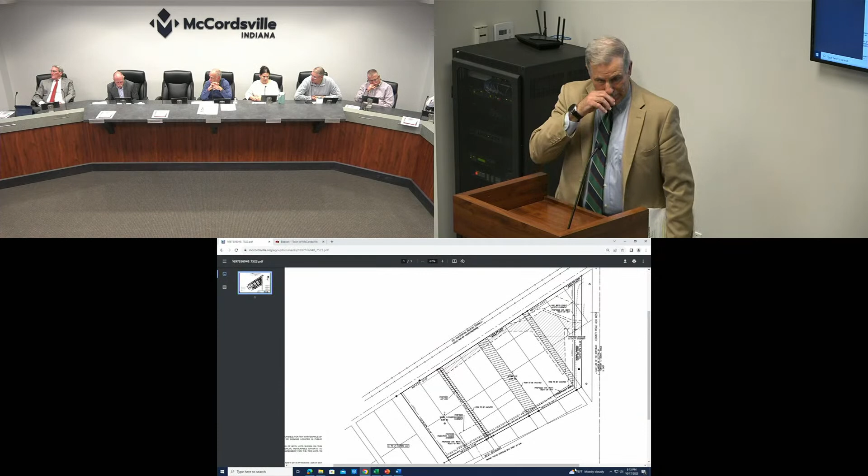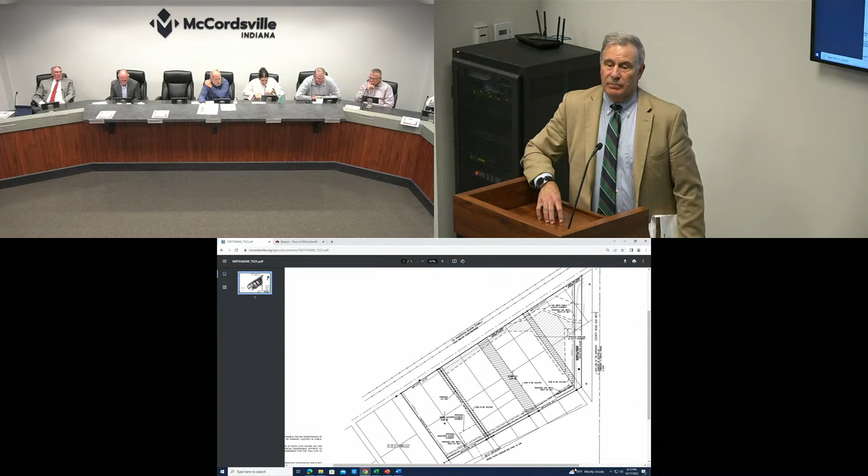So I move we suspend the Plan Commission and open the public hearing on the primary plat for the Swan property. Second. There's a first and a second to suspend the Plan Commission meeting. All in favor, say aye. Is there anybody from the public that wishes to come before us and make a comment on the matter?

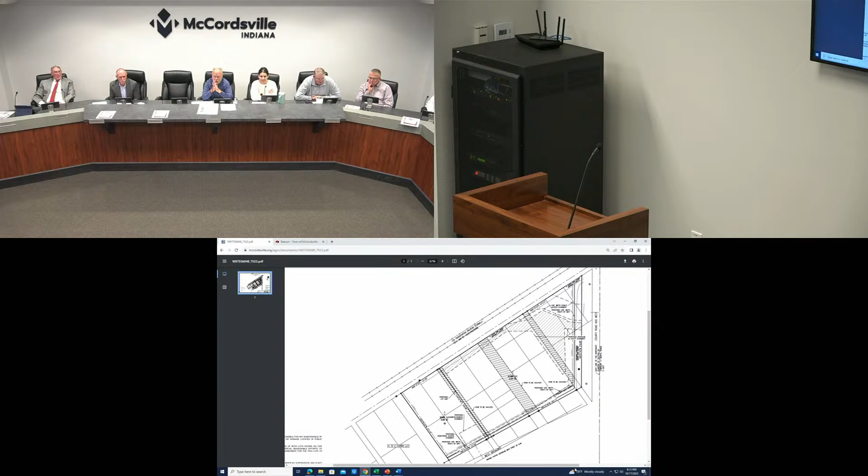Ryan, can you make a note in the minutes that no one was present or no one wished to make a comment? I move to close the public hearing. Second. There's a first and a second to close the public hearing. All in favor, say aye. Any opposed? Motion carries.

I move we resume the Plan Commission meeting. Second. There is a first and a second to resume the Plan Commission meeting. All in favor, say aye. Any opposed? Any other questions or discussion topics from the board or from Ryan?

I have just two, and then I don't know if Mark has anything. I think Joe and I and staff agree that if we could get the existing right-of-ways just a bit more defined, as well as the proposed right-of-ways on the plat moving forward, that's something that can be added post tonight. That'd be great just for future reference. In the future, we'll develop a secondary plat based upon this primary plat, so it'd be nice just to have that put to bed.

And then second, the developer is requesting a waiver of the subdivision control ordinance for half-width right-of-way along West Broadway Street. Staff is in full support of that waiver request. You don't see a lot of these. It's kind of more of a rare thing that we do, but it makes a lot of sense in this particular location. We have a site with 3 road frontages that does not have much depth. It has been a challenging site for anyone to develop for a number of years. That's why the biggest intersection in town is undeveloped.

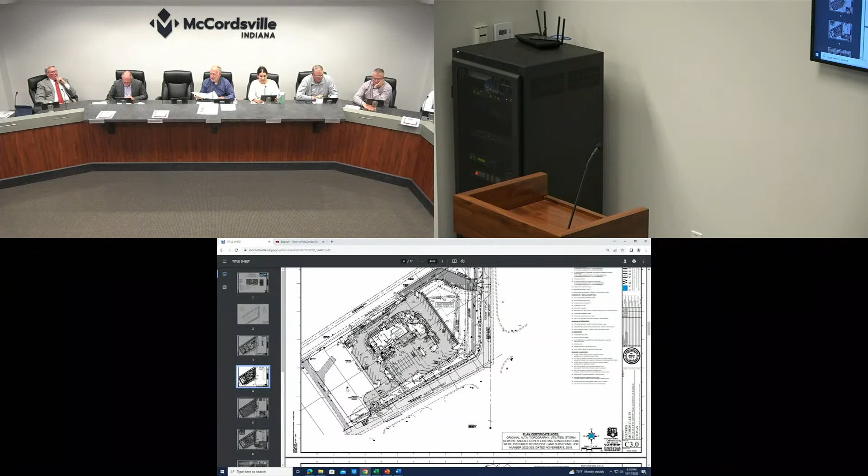All right, development plan. Joe? Okay. You're still under oath.

Thank you again. Joe Calderon, 11 South Meridian, Indianapolis, representing Jim Swan and his entity, Westfield Development.

So there were some conversations running late into the afternoon, mostly between our engineer, development engineer, which is Weihe Engineers, and then Mark, and then Ryan was copied on everything as well. So there probably will be some discussion points, but here's the simple way to explain this site plan: this is pretty close to having everything that you need to see this evening. We think that the open items can really be more worked out with staff. At least we hope so, and that you agree with that.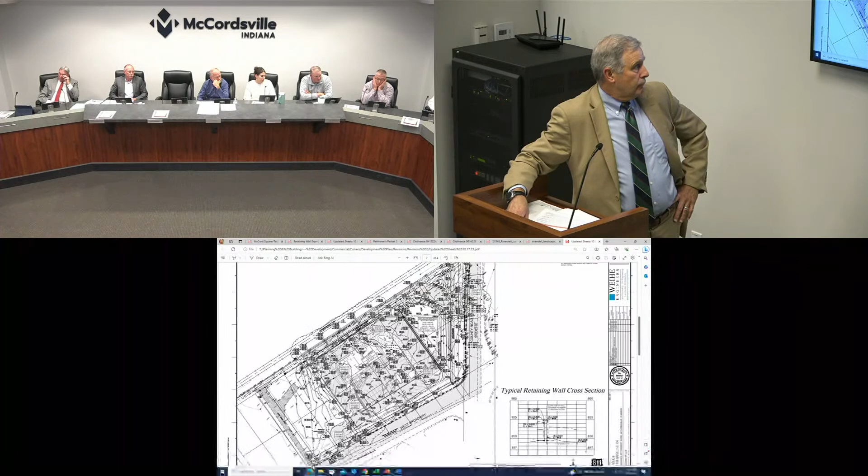The developer - as for the site itself, I don't have any issue with the storm sewer they proposed, but they have an outlet that ties into an existing storm sewer that runs along Mount Comfort Road. That line runs south all the way to the ditch just north of the park and the cemetery. So that's the existing line that runs through there.

The developer has had these discussions with me since the beginning of this development - would I allow them to tie into that? Because currently their site sits in a little bit of a hole, and it does not drain through that storm sewer. So this is shifting that drainage into that - it's not existing drainage into that storm sewer.

So my condition is I'm actually willing to do that if they can show that storm sewer has capacity for what's existing plus their added flow. That has not happened to date - that's still not part of their drainage study. So that's something I think I've made very clear now.

What's the alternative, Mark? The alternative is to run a storm sewer that goes south and west over to the same ditch, but where it crosses basically along the CSX tracks, south and west. And how much difference in cost to the developer?

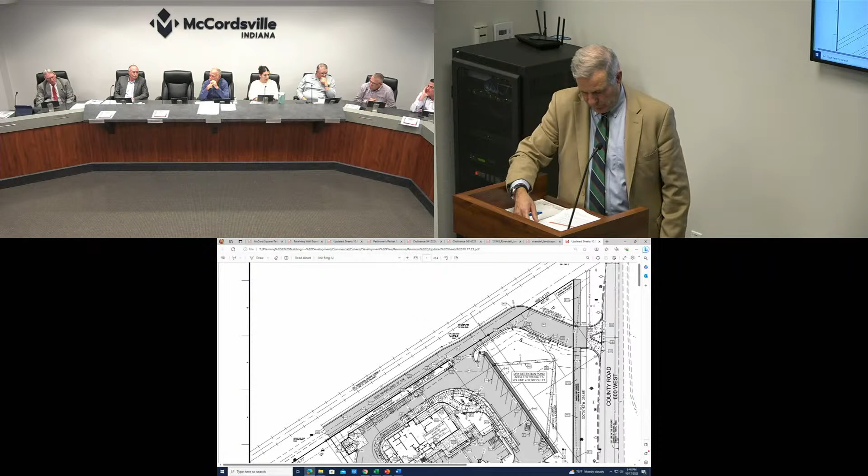The other drainage comment that's still outstanding has to do with the dry detention that they have. We require under-drains under dry detention, and that is intended to help with maintenance. Essentially, when you have dry detention, one of the issues that comes up is that it's a wet area, and you will get cattails and other things growing in that. It's probably not the aesthetic that you want.

So we have that in our stormwater technical manual, the requirement for dry detention to include under-drains. And that hasn't been addressed.

So we're still working on that, with the intent to just make sure that we can maintain that in an aesthetically pleasing manner, since it is very front and center.

I think, Joe, correct us if we're wrong, but what we've heard is that in order to put under drains in it, it's going to require some significant grade changes to the site. So I think that's been the pushback, or probably the franchisee, is why they're showing the concrete flumes instead. So that's a discussion point for the plan commission: what do you want to see in terms of dry detention design?

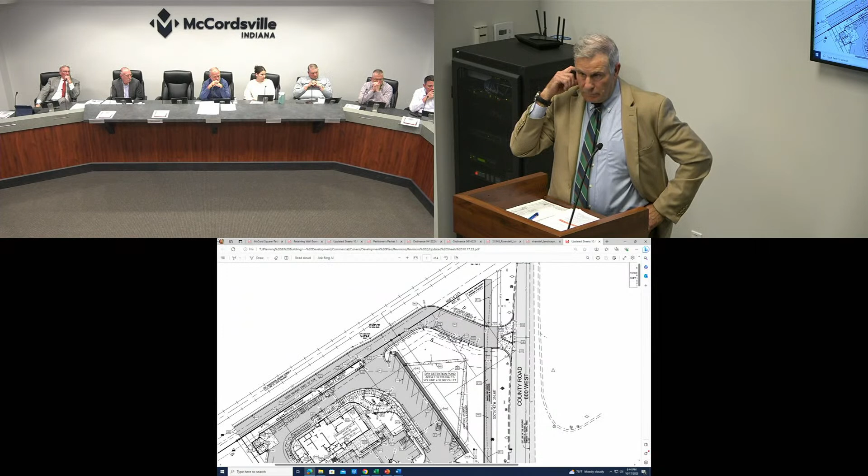So if you put in, it's essentially a concrete swale that goes across there, so low flows stay within the channel, and then they flow straight across and don't wet the area. But in practice, I have not seen that work very well, so I'm not enthusiastic about it.

It helps if you've got the developer promising to maintain, but you just need a clear understanding that he's going to hire a landscaping contractor that's going to come in, and they won't be maintaining an area that's wet—so they won't be able to mow it like they would if it had an under drain. So there's a potential to get grass in there? The expectation is that you'd have grass in there that could be mowed.

I suppose that would be the most advantageous thing. The concern is, of course, if it doesn't have under drains, it will be too wet too often to mow every week, and then you start getting other stuff growing in there—otherwise you get willows and sweet gums and water locusts and so on. It would eventually dry as soon as you have a dry period, and then someone can mow it, but it's the ongoing maintenance that you're gonna see periods where it can't be mowed.

How tall is it, right? I can't see the elevation. I do not know that. Mark, you have to know that off the top of your head. I want to say it's 4 or 5 feet, but I'd have to look at the plans to be certain. Does he have it in his notes? H6? Could be.

I wonder if it's over there. I can't read any of that. Can anybody else? It didn't have the height, just the elevation on it? Okay, refer to structural plans in detail. It might be in the CD set.

Does that retaining wall have to be concrete? Couldn't we drive in steel pilings that interlock and then build a more decorative timber wall in front of it? The steel pilings would do the retaining. They're fairly inexpensive to put in with a vibratory hammer on an excavator. The folks that do this around here are located in Fortville, and they do it building seawalls on Geist. They even retain water, and they put them in lakes and build a wall, and then they can work behind them and push the lake out from their site.

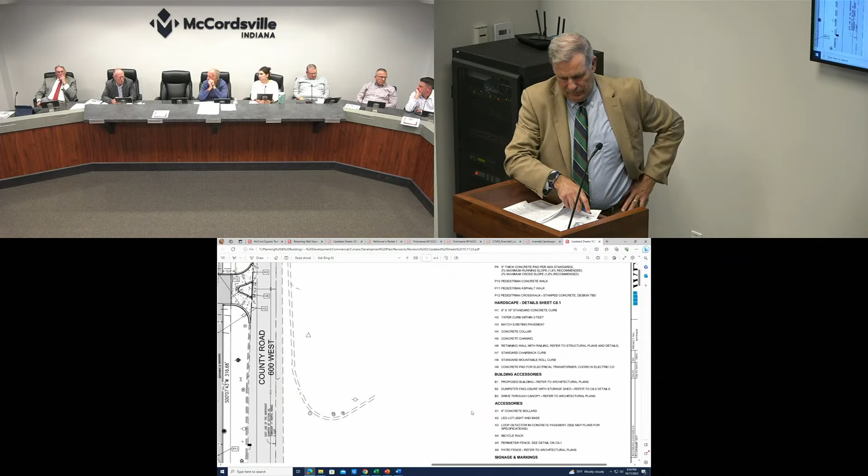So that could do the retaining, and then you could tether any type of keystone block wall you wanted to the front of it that would just be decorative. It'd probably be way less expensive than trying to do stamped concrete on a vertical surface. Just a suggestion. Yeah, anything that was decorative in nature, staff would be comfortable with, more decorative than a plain flat concrete.

So we'll say decorative retaining wall, leave it open to some interpretation. Okay, that wall height is 4.1 feet.

For those steel pilings to be driven down, you just can't have bedrock under there. I don't think there is. I think we have like 60 feet of glacial till or something on top of the limestone, don't we?

Really minor thing, and I just normally would probably just approve this, but since we're here discussing it, the BZA's motion actually asked for this pork chop to be landscaped. That could probably, again, it all comes down to the design and how large that pork chop is. This one, as shown, probably is not large enough to maintain much landscaping. If it becomes more dramatic and larger, maybe so. But any opposition to, if staff feels it's not going to be maintainable, approving it with concrete instead of landscaping?

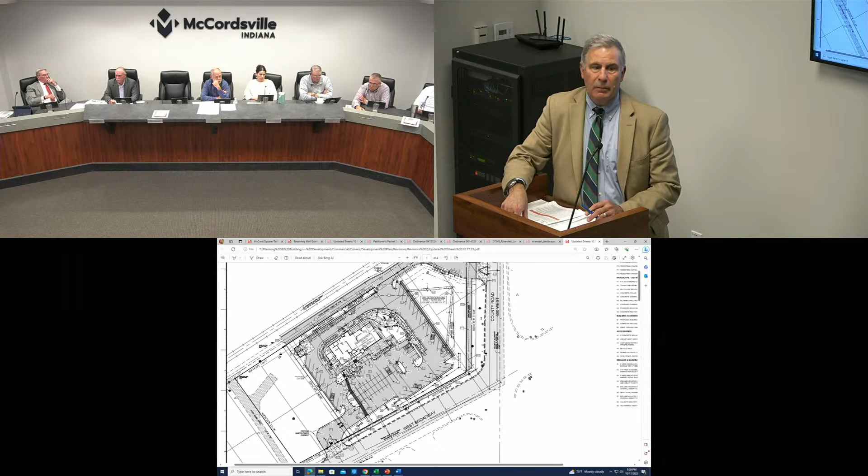Do your town center lights meet that for a busy intersection? This isn't in our code yet. I suspect these tech lights would meet those requirements, but we'll need to review it and see. You can get any kind of LED really you want on top of the pole, and I think they sell them with all the different ratings.

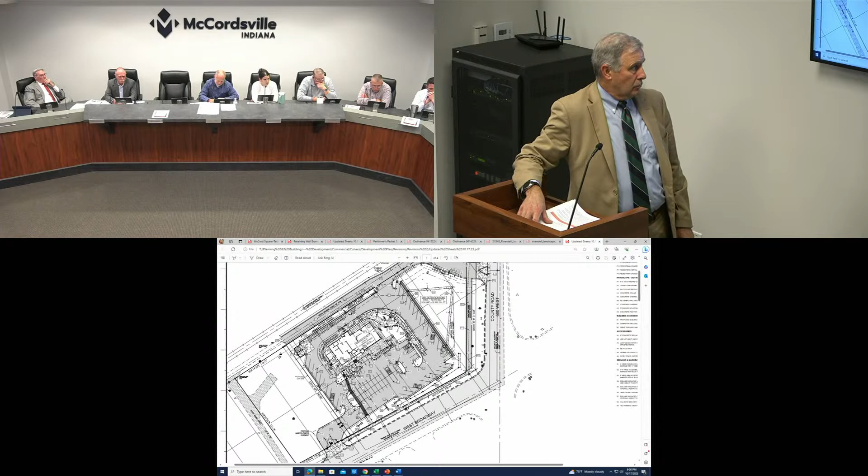So I might suggest, if I could, that any motion of approval tonight include the following conditions: that a more dramatic pork chop be utilized, that the restriping of Broadway is included on the plans, that the pipe capacity is either proven or the drainage goes to the southwest, that under drains are provided in the dry detention, or a maintenance agreement is agreed to for the dry detention basin, that there's a decorative nature added to the retaining wall, and that a lighting plan that complies with staff's request and the ordinance is included. Make a motion to approve as presented by Ryan Crum with those conditions.

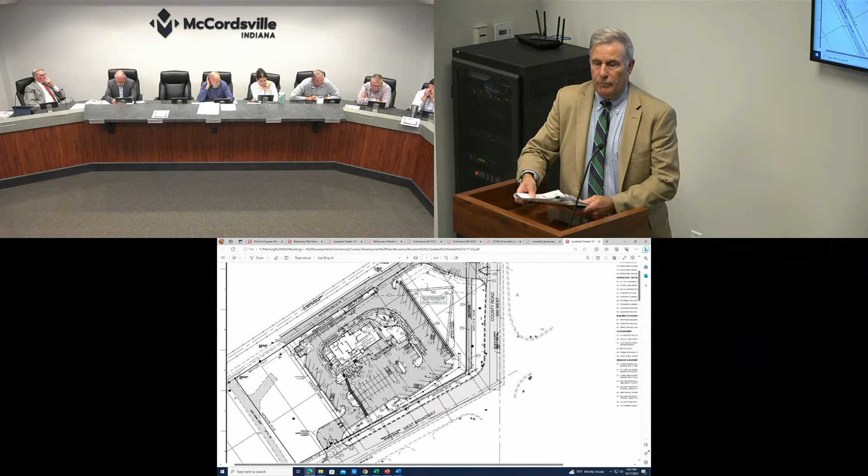There's a motion of approval. Do I have a second? Second. There is a second. All in favor say aye. Aye. Any opposed? Motion carries.

Really appreciate it. We were running out of time on our contract. Thank you. Thank you.

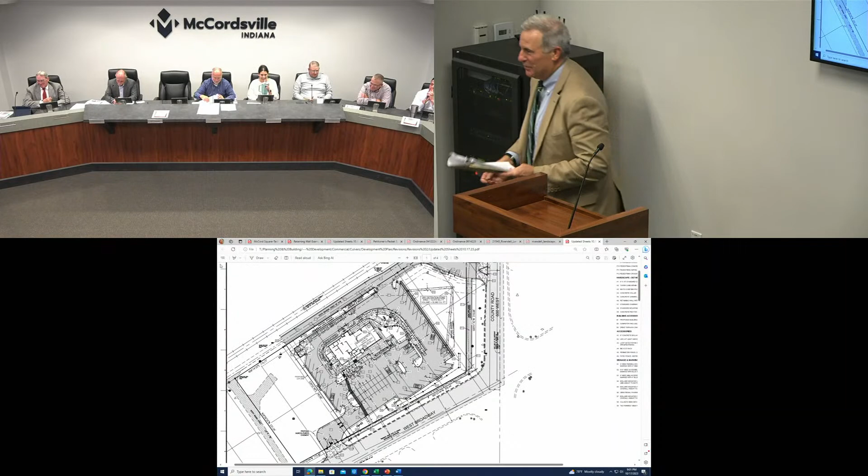Looks like the next item under new business is Fritz Engineering, request for approval of development plan. They have waited patiently, we appreciate it. Did we need to do anything on the building elevations on Culvers? No, the ARC took care of that earlier tonight.

So, the location is 7419 North 600 West. This is along the east side of Mount Comfort Road between Greenfield Bank and the new dentist, just south of 750, and it's basically in front of the multi-tenant center with the United States Postal Service in it. This is a proposed neighborhood commercial zoning, and the proposal is for a multi-tenant building. It's got the Qdoba moniker because Qdoba is looking to take about half the building, a little bit less than half, but it is a multi-tenant retail building that will eventually have other users in the space as well. It's a total of about 5,400 square feet.

The BZA has reviewed this item and granted a special exception for a pickup window and a number of variances, which we're happy to detail if need be. And then 2 points of ingress egress, one along the east-west internal drive and one along the north-south internal drive. Those locations were discussed early with staff and we agreed were the best locations to ensure that any stacking or traffic that would occur would not funnel itself out onto Mount Comfort Road.

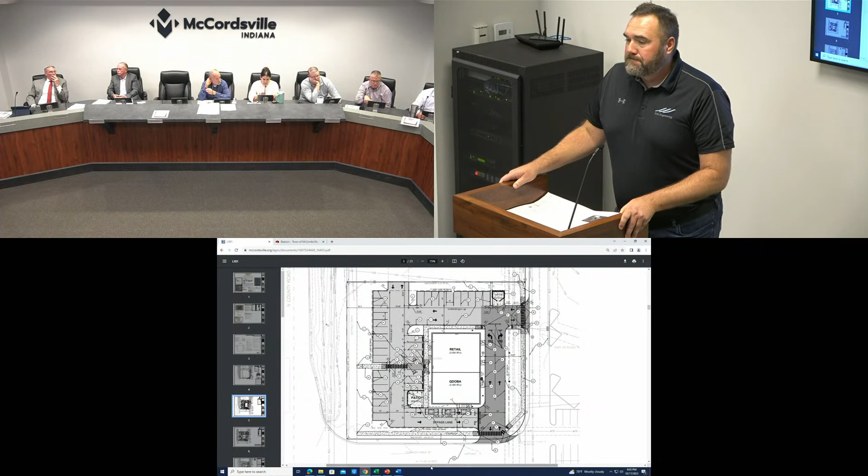Any questions from the board? Brian: I was just going to ask, on the building elevations that are listed on the agenda, I know on the BZA we talked about the signage above the doors on the east elevation. Did that get changed at all? I just don't see it here. It's not shown. So it will be there.

There was approval granted by the BZA to allow some signage over each of these 3 doors, small 6 square foot signs, just to help people understand where they're at in relation to the front of the building. So as tenants fill those spaces and they submit sign permits, we would then approve them as long as they're contingent with those conditions of approval.

That is the east side of the building. It's, for all intents and purposes, the back side of the building, but we don't really have a back side because we have drives off and a public road on the west side. So that was just to identify the various tenants in the building if you're internal to the development.

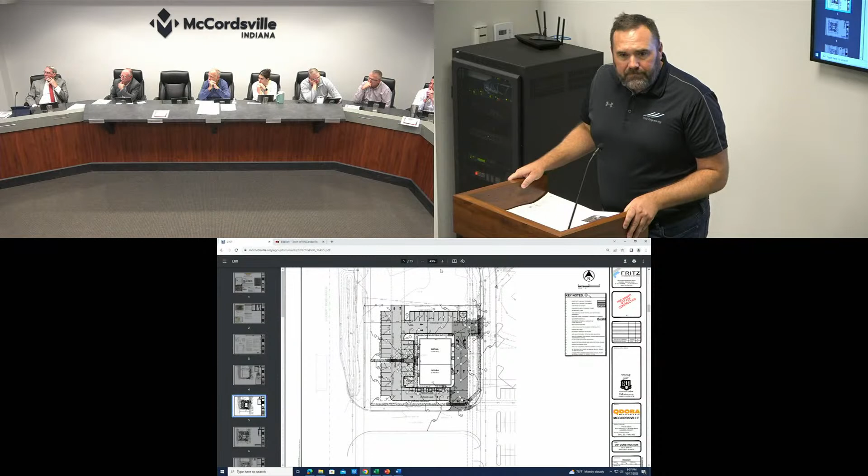You're going to have an outdoor eating area in the front? There is a proposed patio in the southwest corner of the building. I'm asking about coverings over the tables, those will probably be umbrellas? I don't know that we have an answer. As opposed to an overhead awning that's supported by pole? Correct, there is no overhead awning over the patio proposed.

I just don't want to have flying umbrellas. It's quite windy coming across Mount Comfort Road from time to time. We get straight line winds and storms, 60, 70 miles an hour, and the umbrellas will go flying if they aren't tethered somehow into some type of footing. Yeah, a base for them. Sure.

You don't see the need, or there's no potential for the northern part of this to be some form of other food establishment that would need pickup or drive-through windows? Is there enough expansion room in case that was ever something? If one of those other tenant spaces sought that, they would have to go to the BZA and go through the process to get that approved, where we'd have to look at whether parking's available and appropriate and how the circulation would work, because I would be concerned with circulation with a second window.

Right. Yeah. Okay. The sanitary is not set up with the infrastructure necessary for a restaurant in that space either. So if one was desired, there'd be some significant changes that have to be made. Okay. Thanks.